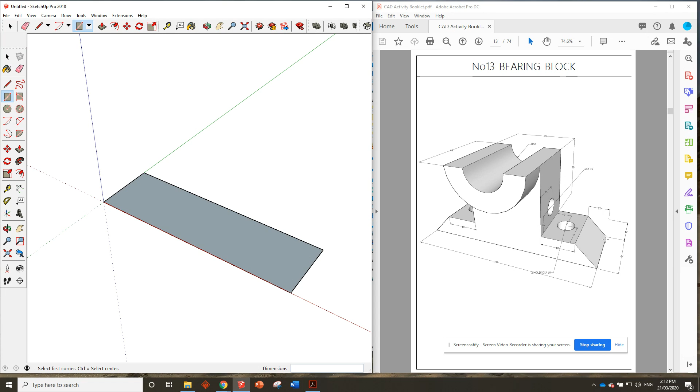Now, I think this one might be getting us to do a bit of maths to figure out how high it is because it doesn't give us the overall height. That's okay. We can see these little chamfers on the side here are 12 millimeters. So when you go 12 plus 38, if I add that up, that comes to 50, doesn't it? So 50, enter. Perfect.

Let's, for starters, maybe we will just remove another L shape over here, or like just a block out of the corner on each side, and then we can do the chamfer. So let's get the measurements of that. We need to come 12 millimeters up from the bottom. And then from there, we go 12 millimeters in. That's the top of the chamfer.

If we'd like, we could even put the chamfer line in now. And then from there, that flat spot is 18 millimeters wide. So grab the tape measure from there, 18, enter. Perfect. Now we can just finish this off with the pencil tool if we like, from here, and then straight up to the top, push this whole thing out of the way.

Okay, that's pretty cool. Now I'll show you a little trick that might save you a lot of marking out in the future. You will use this later on, but I'll show you it now. If we click on this line here, and we hold down Shift, and we click on that next line there, those are the lines that we want basically identically on the other side.

So if we grab the Move tool, and if I hold down Control, you'll see a little plus come up under the Move icon. So see if I press Control or press it off, see a little plus that's coming up? If I have the plus on there, and I click on what's selected, it's going to make a whole other set of lines for me that I can copy.

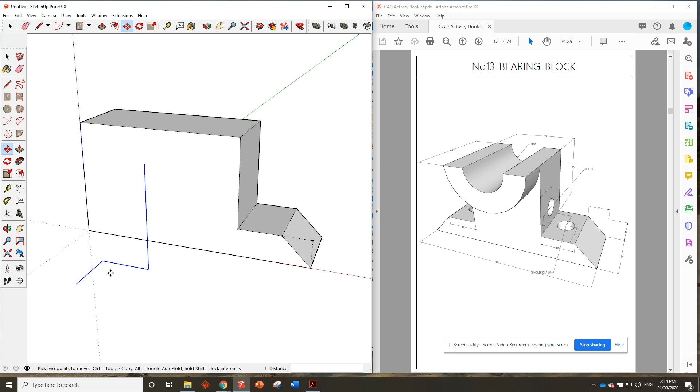Let's see, red direction. First time it worked. Perfect. Sometimes you got to go red. If that didn't work, undo it by pressing Control Z, try the green, try the blue, until it flips it the way you want it. But got it perfect first time.

So I can now click on that bottom corner, drag it over to that bottom corner, and now I've got a line exactly the same as what I drew before, and I can push that away. Okay? Could have measured and marked it out again, but that's just another new trick we've learned.

Okay. We'll put the holes in maybe at the end. For now, let's get this sort of half circle shape in there. So first thing we need to do is we need to find the center of this top edge. So we'll measure it. We can see we've got 40 millimeters, so half of that would be 20. That gives us the center. Now, what information does it give us about these two arcs?

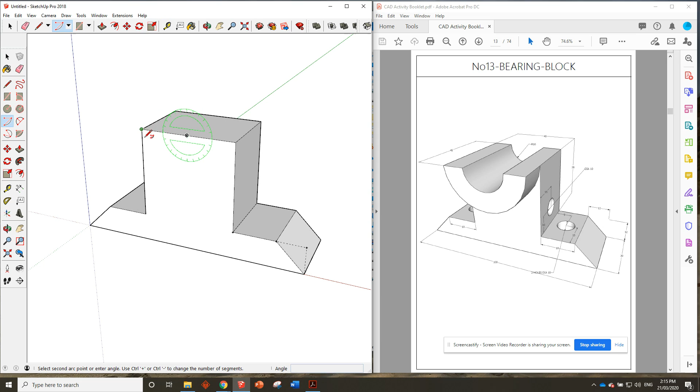One of them just tells us the diameter from edge to edge is 40. So we can put in an arc from here, edge to edge. That's our big one in. Then we need a smaller one, and the information about that is radius 10. So we're going to go here. It's showing on the blue face, so I'll hit the arrow key left. That gives me the green axis. Perfect. We'll go across 10 millimeters, enter, and then put that in.

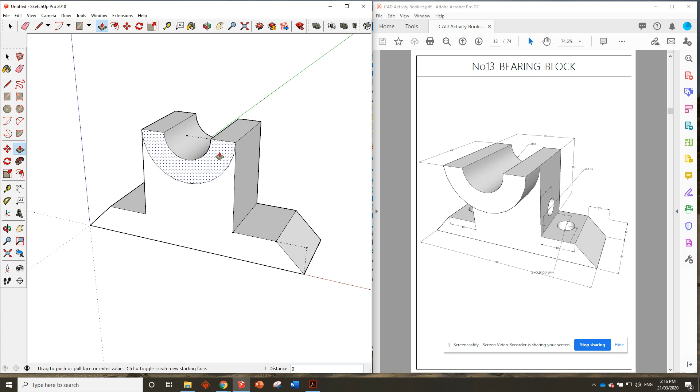All right. All we have to do now is push that one through and push this one out by how far? It says that whole thing there is 45 millimeters, but we're at 30 millimeters thick at the moment. So the difference between 30 and 45 is 15. So I'll go here and just type in 1, 5, enter. Okay, now that bit's coming out the front, which is exactly like it is in the drawing.

That's perfect. Now, the dimensions look a bit complicated to place those circles, but it's a little bit easier than it looks. We can see it says 2 holes at diameter of 10. So that lets us assume that the position of this circle here is the exact same as the position of that circle here. I couldn't put dimensions on that drawing as you wouldn't be able to see it with this bit covering it. So let's help ourselves out a bit.

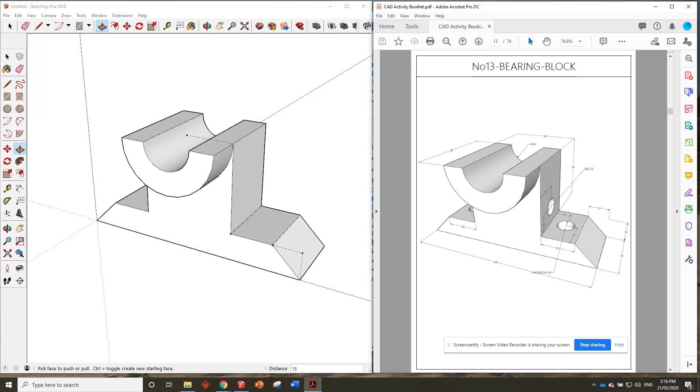We'll go into the PDF and we'll hold down Control and zoom in a little bit so we can see the dimensions a bit closer. Now, we'll grab the tape measure and let's start measuring things out. So here we can see we need to come 9 millimeters away from that edge. So we'll measure 9 millimeters. And then from that point, we need to go 15 millimeters in. 1, 5, enter. While we're here, we'll do it on the other side as well. 9 millimeters and then 15 millimeters in, enter.

Perfect. Now, we will go grab the circle tool, or you can grab it over there if you like. And the diameter of it is 10. If you type in 10, what should happen? Way too big, right? Because remember, whenever we're using the circle tool or the arc tool, it's asking us for, you can see down here, the radius. So if the diameter is 10, the radius is half of that. So what are we typing in? 5. Perfect. Put over here as well.

It's 5. Great. Now, I'm going to push that all the way through to the bottom. On edge red there. Perfect. Double click the next one. And we've got 2 holes right through the bottom. Perfect.

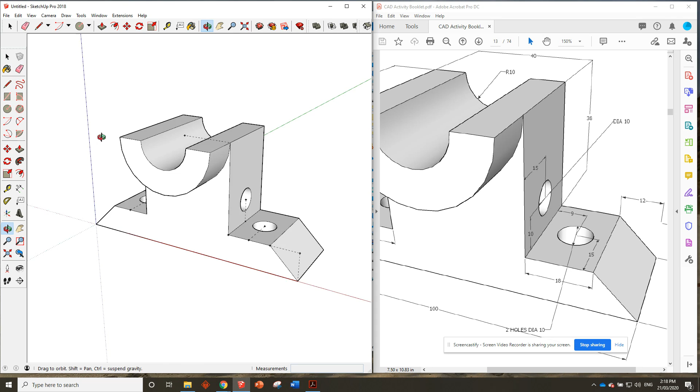Now, the next one, almost the same thing. We can see that it's 15 millimeters away from that edge. So we'll measure in 15, enter, and then it's 10 millimeters up from that point. So 10, enter. Again, the diameter is 10, so the radius will be 5. Perfect. And we're going to push that all the way through to the other side. Now remember, we can't see, so we need to hover over that edge, orbit around so we can check. Yep, perfect. So if we look at that, they look pretty well exactly the same.

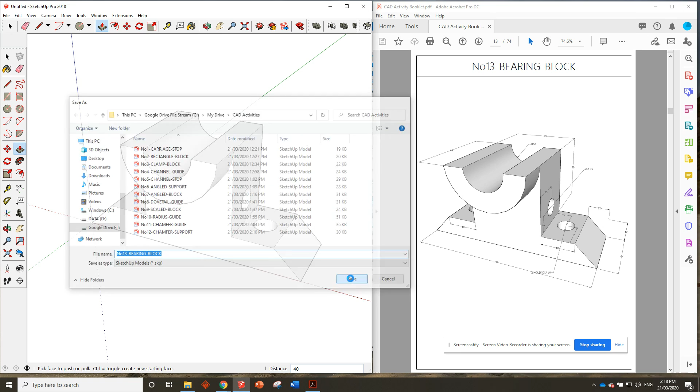Perfect. So edit, delete guides, then file, save it as number 13 bearing block. Great. Okay, good work, guys. We'll go file, new, and our next drawing is a guide stop. Okay, so this one looks like we're going to be using the follow me tool quite a bit. So yeah, I'll see you over there.